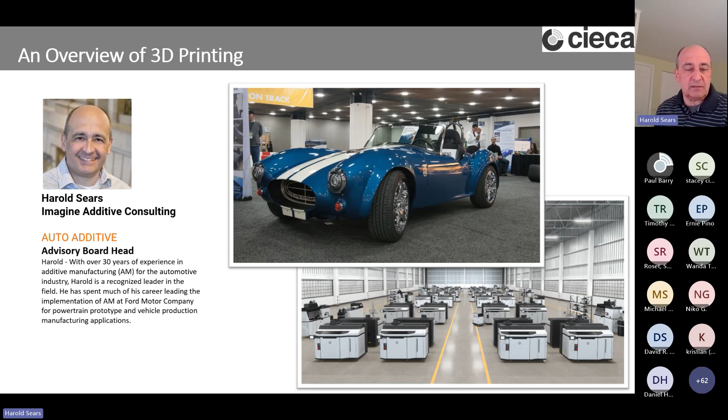One thing to note is this picture of this nice shiny Cobra car here on the screen. The body of that is actually 3D printed. So we'll talk a little bit more about some applications similar to that here in the future. All right.

So first thing, 3D printing, kind of what is it? 3D printing is also known as additive manufacturing, and you will hear me use those two terms interchangeably. Both of them essentially stand for the same thing. It's really the process of creating a three-dimensional object from a digital file by laying down successive layers of material one at a time.

So really the key concept is it's unlike traditional manufacturing technology shown on the top here, where you're removing materials. You tend to start with a block of material, you machine it, file it, drill it, whatever it is, you remove material to end up with your object. And then in the result, you have a pile of waste. But unlike that technology, you really just start with material and you use some sort of device or a process to add material together to make your final part. And the good part of it is in the end, there is actually very little waste in the process.

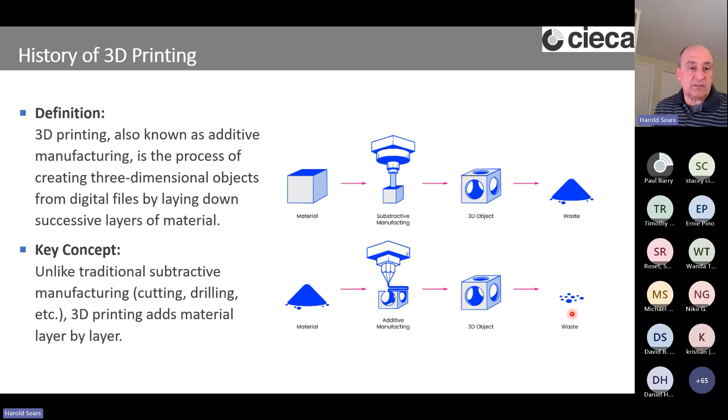So as we look at where did this technology come from? In 1981, Dr. Kodama developed a technology to use UV light to harden polymers. So some people kind of consider that the first version of 3D printing. Some people will debate that.

But really the first sort of machine to actually be able to make three-dimensional parts was developed in 1984 by Chuck Hull. Chuck Hull developed a technology that he referred to as stereolithography, or you hear it referred to as SLA quite often as well. And this was a machine that used photocurable polymers to create three-dimensional objects. And so he's really been considered the father of the technologies because he was the first one to really mechanize the whole process and make it somewhat automatic.

In the 1990s, there were a couple of other key inventions that came into play. Fused deposition modeling, known as FDM, by Scott Crump. So the third guy down here in the picture, that's Scott holding some parts with some of his machines on each side. That technology is one of the most popular technologies in the world today.

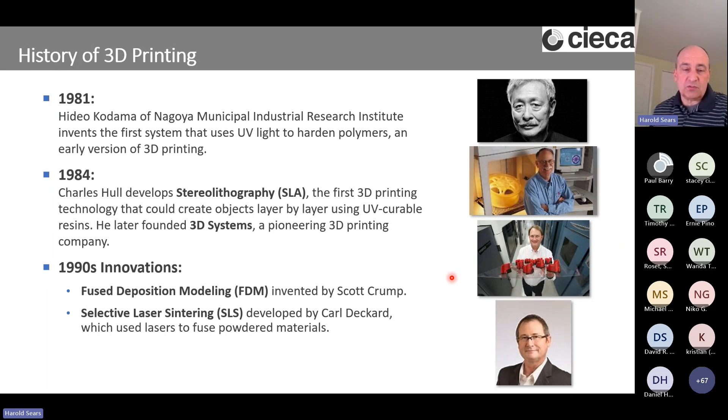And then at the same time, selective laser sintering, or SLS, was being developed by Carl Deckard here in the bottom picture. Unfortunately, Carl is no longer with us, but fortunately, both Scott and Chuck still are.

So these technologies—there's really eight types of technology groupings, grouped by and recognized by ASTM. And if we just walk through these real quick, just so you understand that it's not always just the printer that you see in people's houses or on desktops. It's much broader than that.

So the first one is referred to now as VAT photopolymerization, and that is really the technology that Chuck Hull developed, stereolithography. This uses a vat of liquid resin. A laser is deflected off a mirror down to the surface of the resin. The mirror moves around to direct the laser, and wherever the laser hits the resin, it cures or hardens the material in that area. After it does an entire layer, the build platform drops one layer thickness down into the vat, and it begins to cure the next layer of resin. That process repeats over and over to generate a three-dimensional object.

The second process is referred to as powder bed fusion. This is really what Carl Deckard had developed, what was called selective laser sintering back then. This basically uses a powder. It spreads a powder across the table, and then it uses, again, a laser that's deflected off a mirror down to the surface. But in this case, the laser actually melts the little polymer particles together to form that 3D object one layer at a time. When it's finished, you simply remove all the powder and pull the part out.

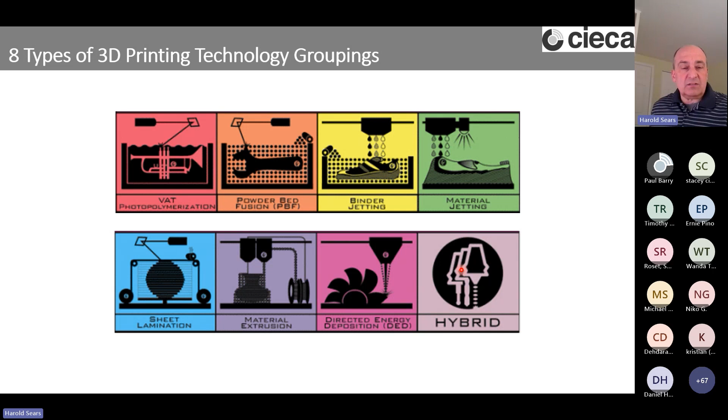So how do all these professional technologies relate to what we're talking about in our application here?

What I'm showing here on the screen is an image generated to demonstrate the power of HP Jet Fusion technology, which can be used to make several parts at one time. This technology allows you to put many parts into a build envelope, as long as they're not touching in your computer model. In this example, there were 300 parts in this space. Those 300 parts built in about 11 hours, which works out to about 27 parts an hour, or one part every 1 to 2 minutes. That starts to give you an idea this could be scaled up to higher volumes, not just 1 or 2 parts at a time.

Probably a more practical application of what we've been working on is something like this, with a variety of different parts, not just all the same part. There's a huge variety of parts here, 140 parts packed into this build. Again, this build would take about 11 to 12 hours to build and tear apart, and after that you'd have all these parts ready to go.

This really demonstrates how the technology has evolved from just making one part in the early days, very fragile and tight parts that could be broken or destroyed easily, to now making many parts at one time, made of very robust, highly usable materials.

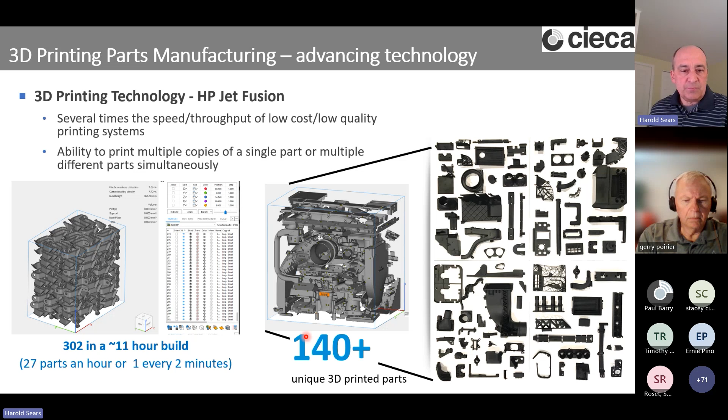In this portion of the picture are some examples from Cadillac. These were some ducts made along with a wiring bracket. This piece is actually the shift pattern that goes on top of a gear shift lever, and it's 3D printed in metal. It's a really nice looking part and a nice accent to the interior of the car.

This example shows customized brake and clutch pedals for a vehicle. In this case it was a performance application where weight really mattered, so these were actually 3D printed in titanium. You can come up with some very exciting lightweight shapes and still have the structural strength needed for the application.

Another thing a lot of folks don't think about very often is not just direct-use parts, but parts or tools to help in the assembly of vehicles. In this example, in the upper right-hand corner, it's a tool used to help prevent damaging this wheel while the lug nuts are screwed in.

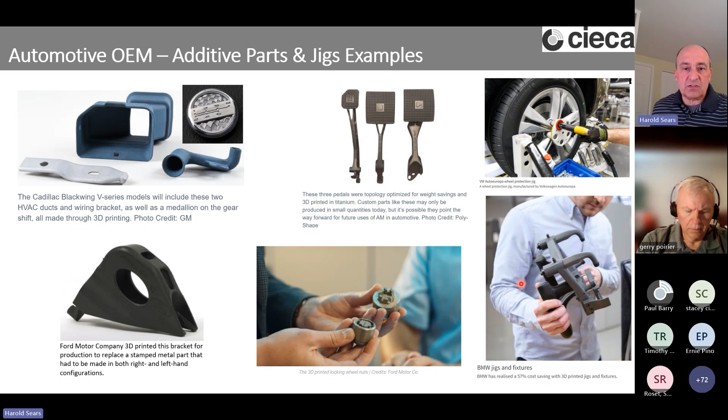A couple more around automotive. The high-end Cadillac that was recently released had more than 115 3D printed components in it. That's one of the highest numbers of 3D printed parts in a production car that I'm aware of. So that's pretty exciting. Good job to the folks at GM on that one.

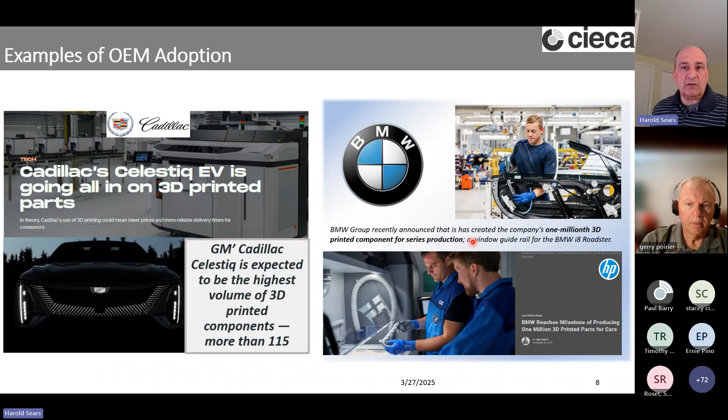This one was published a couple of years ago. BMW announced that they had printed their 1 millionth 3D printed part that actually went into a series production car. That's a great milestone for that team. BMW is one of the companies that's really pushed the technology to be more automotive centric than it originally was.

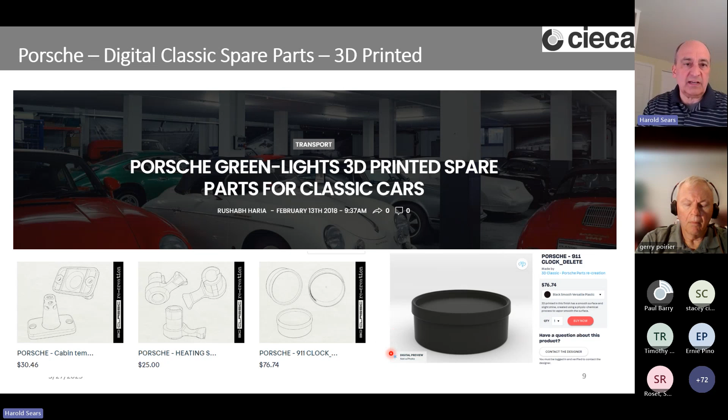Finally, last application around automotive, also announced a few years ago by Porsche. They approved the use of 3D printing spare parts as replacement parts in classic cars, where the tools may no longer be available, or the company that used to be the supplier for this part is defunct. So certain parts and applications have now been approved, and you can simply go to a website and order it. It's 3D printed and shipped to you, with likely little to no inventory of this part sitting on shelves. So it's a great application.

Looking outside of the automotive industry, 3D printing is being used in various things all over the place. One example similar to automotive is Whirlpool, who announced a few years ago that they were starting to 3D print spare parts for Whirlpool appliances. So pretty exciting, once again they're not having to inventory and store tools. They're able to essentially print parts almost on demand, and probably have very little inventory as well.

Off-road equipment, John Deere, a big user of additive as well, announced that they were 3D printing parts for a fuel valve on some of their big tractor applications. Very cool. In aerospace, Boeing and other companies are using 3D printing a lot, with parts going directly on aircraft, both military applications as shown in this picture and commercial aircraft as well. Another transportation company is DB, Deutsche Bahn in Europe, the rail company. They have a whole additive manufacturing center used for printing spare parts for replacement parts on trains. All exciting applications, and I'm not even getting into the medical applications, which are really amazing - you could do entire seminars and days worth of discussion around printing for medical applications.

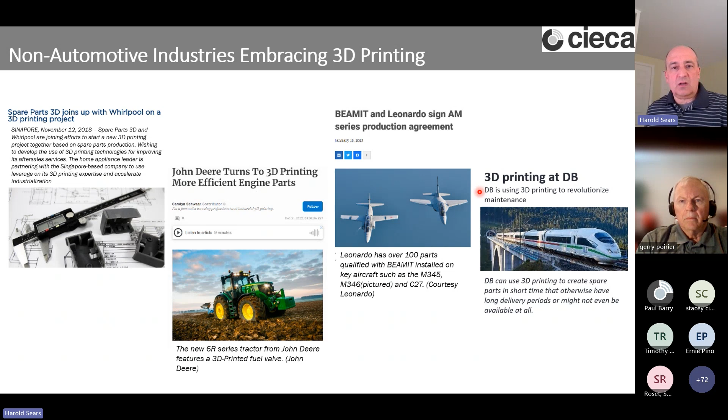Super exciting stuff. So how did that all apply to the automotive collision and repair industry? In 2023, I was asked if I would join an effort to lead an industry task force to study how 3D printing could be used in the auto repair industry, how it could benefit it, and what areas it could be applied to. The first thing we did was assemble a panel of folks who would be involved in this from beginning to end - people who know the industry well, like Jason Mosley, former head of IBIS, and folks like Mario Demolsky from the Boyd Group, who knows the collision industry very well.

So they were on the team. Then we reached out to 3D printing companies, and Francois Minec, who was the head of 3D printing for HP, agreed to join.

We had material suppliers like Rebecca here from BASF. We had folks that deal with training and applications in the industry from I-CAR, Jeff Peevy. We had people from 3M. We even had an OEM supplier on board, Dallas Martin from Toyota.

Dallas has been doing some great things to move 3D printing forward within Toyota. He was just recently in an article that was published about the amazing progress they're making in Toyota toward production with 3D printing. We even reached out to auto recyclers, the end-of-line folks who recycle parts and plastics, and how they could apply them. We even pulled a tier one automotive supplier into the team. So we had a nice broad cross section of the industry.

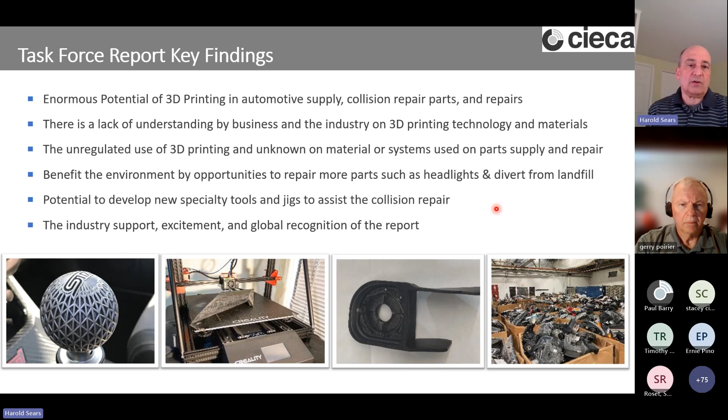But overall, we found a lot of support from the industry. There was excitement, and this report did get quite a bit of recognition globally once it was published. So we thought, we have to continue on with this, more than just a study. We have to start pushing this out and figuring out how to fix some of the problems with the industry to help apply these technologies.

So we met with some industry bodies and regulators, and really found a lack of understanding of the technologies and an unwillingness to take on the role. We had others that wanted to generate member-paid authorities, which we were not in favor of at all.

We're like, look, this is an industry problem. We're not going to make it a club that you have to pay to belong to fix these problems. The problems need to be fixed across the industry. We were running into issues with alliances in the industry, that certain companies are aligned with certain governing bodies, and there was not a real desire to mix across that. So we just kept, unfortunately, hitting dead ends as we were trying to address this.

But being the type of people we are, working on the cutting edge of technology, we don't give up easy. We're determined not to fail. So we really used the report to generate a framework for a new business.

We went through it and said, okay, let's adopt technology that the OEMs are starting to use. Let's look at the same printers, the same materials they're using. Let's partner with the right people who are involved with these technologies and work together to provide these solutions. Let's prove to the industry that these solutions are as good as other parts supplied with traditional processes.